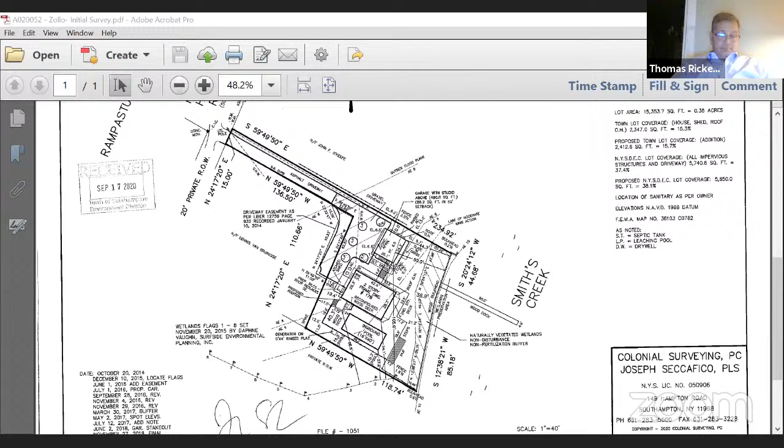It was an extremely frustrating process and very time-consuming, very costly to my clients. So we're here because we really don't want to go through that process again, because it was a nightmare.

The additional area that Marty's requesting on the south side, like I said, is naturally vegetated. The decking for the swimming pool is elevated, so it's not an area that's used by my clients. If the pictures that I submitted can be brought up, you can see what I'm talking about.

Daphne, did you email those to me or were those hand delivered? I emailed them to you, and I also uploaded them when I signed in to speak today. I don't know if Charles has access to them. I'm not sure how to get access to ones that were uploaded. Charles, do you know? Let me check my email right now. Actually, hold on, I think I got them. Yeah, I think I CC'd you on an email to Marty earlier this afternoon. Yes, I found them, hold on one second. Hold on, yep, that's them.

This first picture you're seeing is taken from the existing dock out in Smiths Creek, looking at the property. You can see the buffer is there, comprised of beach grass. There's also some bayberry, I think there's beach plum in there as well. It's heavily vegetated, it's in great shape. It's definitely an enhancement to the property.

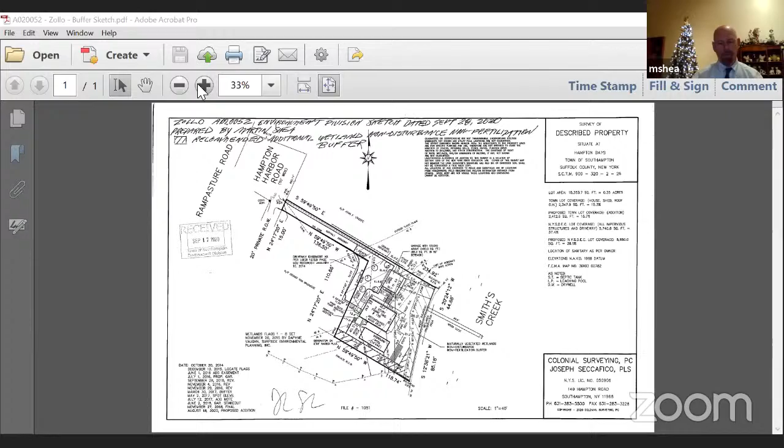Consistent with the board's policy of recommending additional buffer as mitigation when further development is planned at a site such as this, I have recommended a minor expansion and reconfiguration of the existing covenanted buffer. If you look at the southerly portion of the survey, I should mention the existing buffer, although well vegetated, is only about 10 to 20 feet wide.

The property, as you can see, fronts on Smiths Creek. This is a very environmentally sensitive area. You have extraordinary vegetated tidal wetlands to the south. So my goal is to ensure for the long term that those wetlands and their public values and benefits are well protected.

The change in the buffer that I'm recommending in that corner would include that triangular slashed area, which would actually link the existing landward boundary of the buffer with the landward boundary of tidal wetlands on the abutting vacant land to the south. And as indicated by the applicant, it would also continue along the southerly property boundary. It's a minor expansion in terms of buffer, but I think it's absolutely critical to mitigate the impacts of this project.

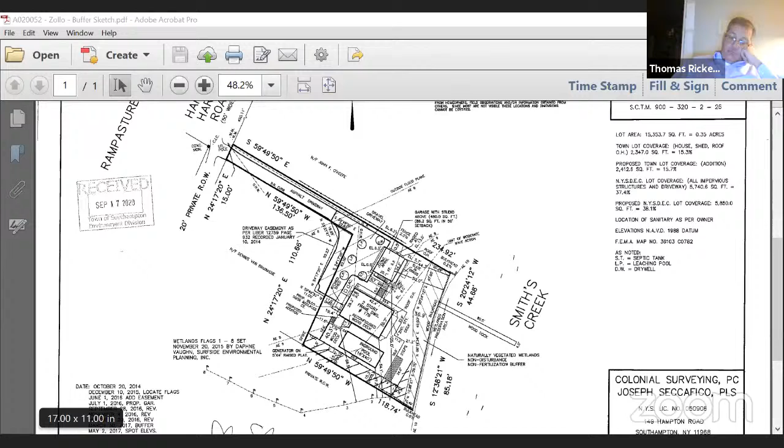Marty, could you help me out here in terms of what the purpose of a covenanted buffer would be if nothing really can be done with that particular property, and nothing can be done with the adjacent property, building-wise? Yeah, that assessment is actually incorrect. As per the town's building and zoning code, the landowner would be able to install a fence line along that southerly property line. They may be able to put additional utilities such as propane gas tanks. I think previously we had legalized the location of the pool equipment in that area.

So as you know, fence lines present a barrier in terms of wildlife use, so they are of concern. And the placement of any additional utilities, or let's say a kayak rack or something like that, by this owner or future owner, would result in clearing and loss of those valued native mature eastern red cedar trees. So the covenant is absolutely needed to ensure that none of those types of activities occur within that area.

While the frontage on Smith's Creek, they're trying to preserve the cedar trees there. I'm sorry, is that what you just said? You wanted to preserve the cedar trees that are in that? Yeah, the existing mature native Eastern red cedars. And in saying that, I'm not questioning whether or not the current landowner will continue to be a good steward of those trees. We're planning for the long term to ensure that future landowners don't cut those trees, clear that area, put a fence line in that area, put utilities or other uses in that area that would impact wildlife use and would impact the wetland values and benefits.

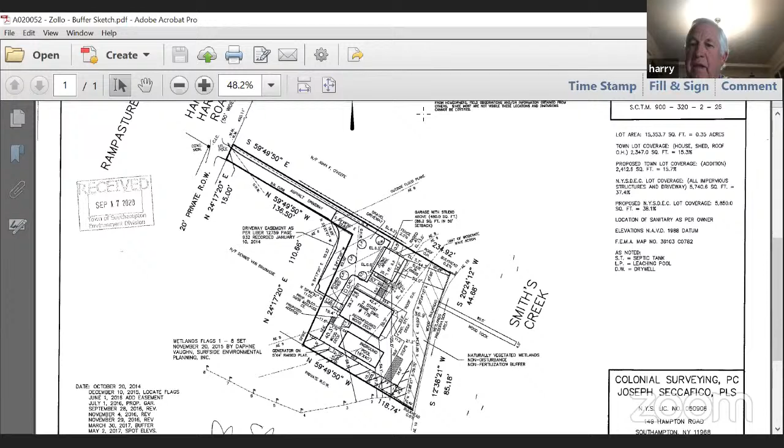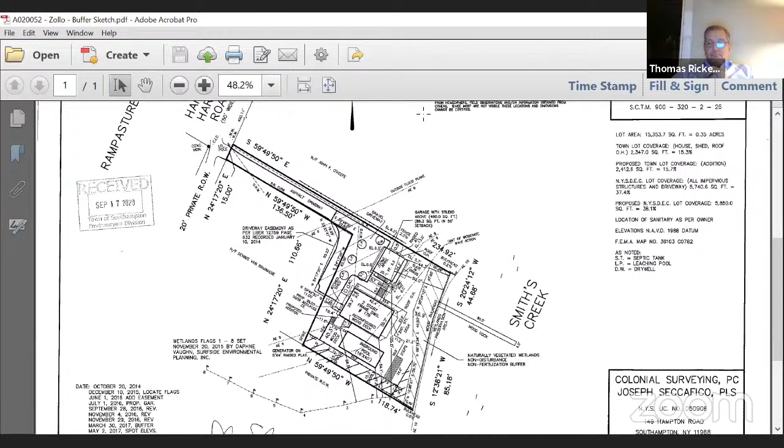I'm looking at this survey and I'm not able to tell the distance between the swimming pool and the proposed buffer. Is that in anybody's paperwork that has better eyes than I do, or with bigger print? Which setback are you looking for? The proposed - I'm looking south of the buffer, swimming pool and north of the proposed buffer. I'm wondering what that space is.

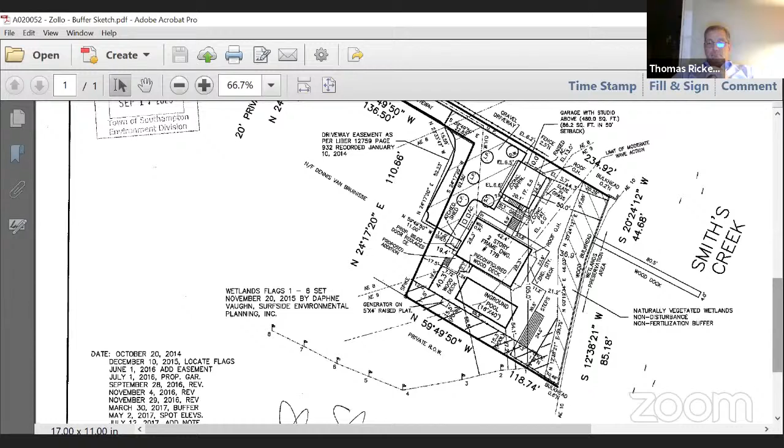Well, it's basically butted right up to the deck. So is that what you mean? Well, if it is, I thought there was a space there, but I could not discern the distance. There is - it's the part of the deck that goes on that side of the pool. Oh, yeah, so there is no distance between the pool deck and the buffer? No, there is - you can walk around. There's a narrow area on that side of the pool that you can walk on the deck. Right, but it's deck. So what he's saying is that the buffer would extend right to the edge of the deck.

Oh, I'm sorry, I misunderstood. We generally leave access for repairs and such and maintenance around structures. Yeah, but there's nothing stopping her from accessing through that buffer. Remember, we had this conversation in the past about what a non-disturbance, non-fertilization buffer means, and Marty had given testimony that you're allowed to access those areas and put chairs in and sit down there and do other activities as such. So I wouldn't see why she couldn't get in there and work under the deck.

Can that be confirmed by Marty or Kelly? Well, obviously, if the landowner had to do customary repairs to the deck and had difficulty accessing some of the joists or something like that, we would certainly, if necessary, allow for some pruning of branches to get under that portion of the deck. Generally you can get in there, but if they have some difficulty, they just need to contact me and I'll work with them to make sure there are no issues in terms of maintaining that deck.

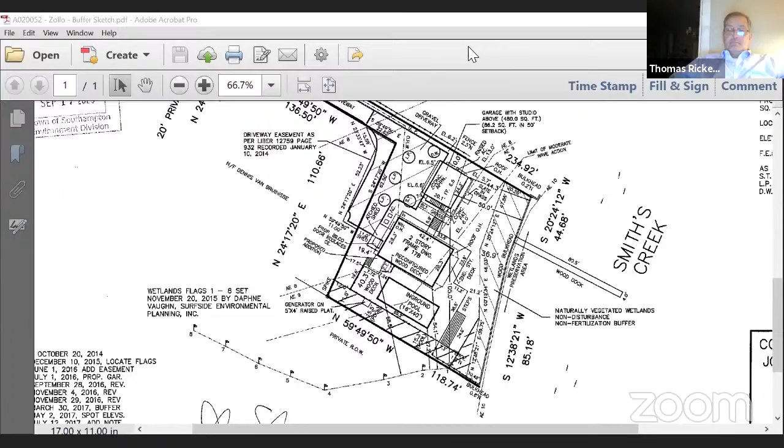And to the point of the bank and whatnot, for the very large, when we were adding on the garage, I totally understood about getting the bank. And I understand that it's our personal dilemma that we happen to have a mortgage with Chase, and they've proved to be very difficult. But the scope of that project was, as you guys were saying, so much bigger that I wouldn't have even thought of asking for forgiveness from that portion of the request.

The code actually recommends that where new construction is proposed within the existing footprint of structural improvements, a minimum 50-foot buffer be established. So I'm asking for a very minimal buffer.

No buffer, no covenant, right? Can't have a buffer without a covenant.

Well, you can, but we try and make sure that buffers are covenanted in order to guarantee their long-term protection. Wait, so we can have a buffer without a covenant? Well, you can, but... It's typically recommended that you record a covenant so that the buffer requirement runs with the property. That's not to say you can't require a buffer without a covenant.

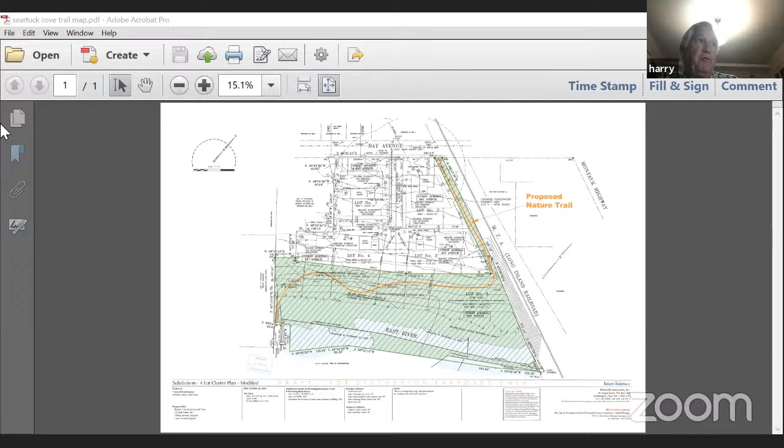Is there a motion to approve the draft conditions of final approval? So moved. Second. Resolved that the Town Conservation Board hereby approves the draft conditions of final approval of the subdivision of Seatuck Estates, which were referred by the Planning Board to the Conservation Board on November 24th, 2020.

All in favor? Harry, aye. George? Aye. Tom? Aye. Ann? Aye. Jerry? Aye. And Michael? Aye.

Administrative wetland permits are in your packets, conditional approval. Wait, you have to go over the scope for 94 Dune Road. Oh sorry, I completely skipped that one. Sorry, we got one more - Planning Board, 94 Dune Road Holding Corp. Yeah, we got to do that tonight, the draft DEIS scope.

Okay, so Teresa Mason from the Environment Division. This property is known as 94 Dune Road Holdings Corp, also known as Dockers, which currently houses a non-conforming restaurant and dock with some tennis courts. Again, as discussed at the last meeting, this application for the conversion of the existing non-conforming restaurant to 25 condominium units, which is also a non-conforming use, requires preparation of a draft environmental impact statement due to the potential negative impacts of having 25 units on this parcel, which is approximately 8 acres, half of which is wetlands.

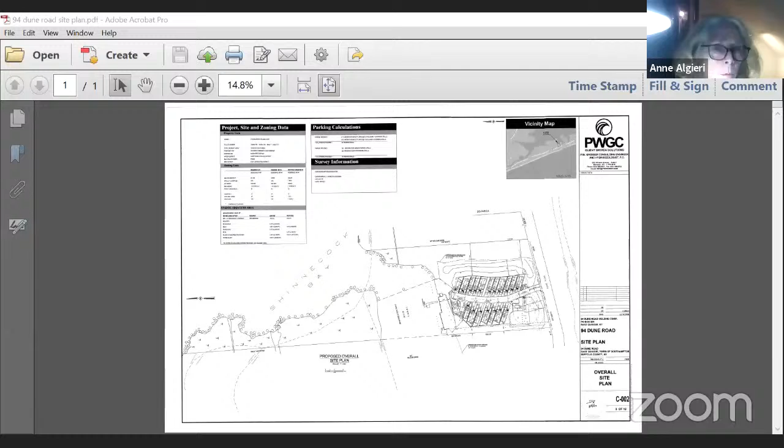Welcome. Teresa, I don't know if it's important to get in there, but Jerry brought this up about the flooding, in point number 9, where there's reference to the inundation during future storm events. At this point, there's even a sign up there saying you may not be able to get through during high tides. There's flooding there without storms, just on a regular basis.

If you look at point number 11, the transportation subsection, it says it needs to be amended to ensure the analysis of traffic impacts associated with construction during the summer season is included in the DEIS. Furthermore, traffic impacts during a coastal evacuation needs to be included in the draft scope.

And then also, item 12, it goes on to say— oh wait, no, that's not the right one. Number 9 talks about the coastal evacuation and the storm events and potential barrier breach.

Teresa, could you clarify, these comments are in regard to their DEIS scope, correct? Right, so it is in response to their scope.

So the process works like this: the POSDEC gets issued, and the applicant submits a scope, which is an outline of what's going to be discussed in the DEIS. And this is where we say you need to talk about A, B, C, and D also, and that would get incorporated into their final scope, which would be the basis for their draft environmental impact statement.

So this is a preliminary process before they actually do the DEIS, correct? That's correct. Everything that gets put in the final scope that gets adopted by the planning board has to be addressed by the applicant in the DEIS. So that's the next thing we'll be waiting for, the actual DEIS. That's correct. And then we can respond to that.

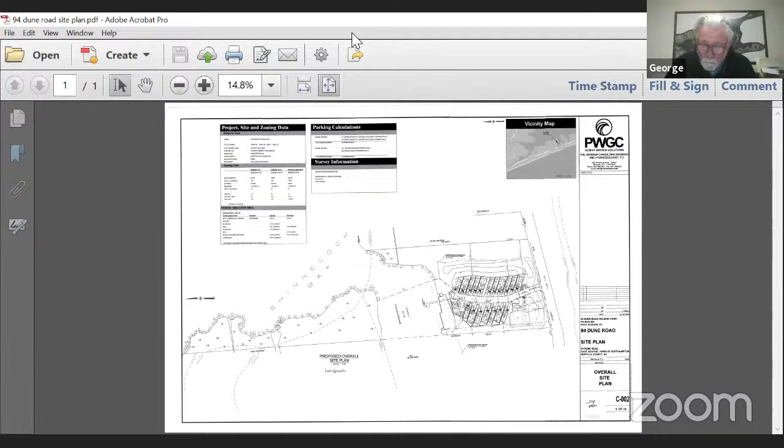Okay, thank you. You're welcome. Anybody else have any other comments they want to add to the report? No, just you did a very nice and thorough job. Thank you. You're welcome.

Is there a motion? Making a motion to have the comments sent. Second? All in favor? Harry, aye. George, aye. Tom, aye. Ann, aye. Jerry, aye. Michael, aye.

And now the administrative wetland permits in your packets. We'll move on for conditional approval.

020009 Almonds LLC. Any discussion? Move to issue. Second. Resolved that a conditional wetland permit approval be granted to Almonds LLC for the proposed project upon the terms and conditions set forth therein. All in favor? Harry, aye. George, aye. Tom, aye. Ann, aye. Jerry, aye. Michael, aye.

A 020053 Lewis Kennedy. Any discussion? Move to issue. Second. Resolved that a conditional wetland permit approval be granted to Lewis Kennedy for the proposed project upon the terms and conditions set forth therein. All in favor? Harry, aye. George, aye. Tom, aye. Ann, aye. Jerry, aye. Michael, aye.

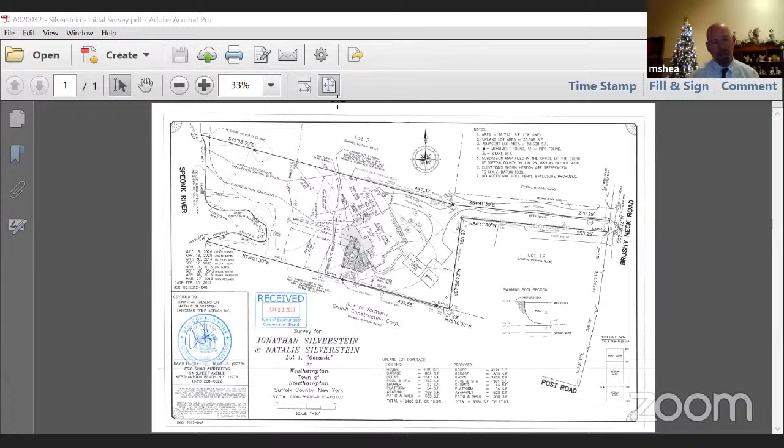The property, as you can see, has frontage on the Speonk River and contains extensive tidal wetlands, as well as naturally vegetated buffers that have been preserved through establishment of a conservation easement and covenants previously required by this board. The applicant is seeking a wetland permit in order to undertake various renovations and improvements, mostly within the existing footprint.

They include demolition and reconstruction of the on-site swimming pool, partial deck demolition and replacement with some deck addition. The stairs need to be reconfigured. The shower needs to be replaced. There's an exterior barbecue as well.

There is a preliminary advisory report on file dated November 27, 2020. Years ago, when the Conservation Board had previously issued a permit, the covenant that was recorded allowed for the buffer to be managed by one annual mowing throughout virtually the entirety of the buffer and easement on this property.

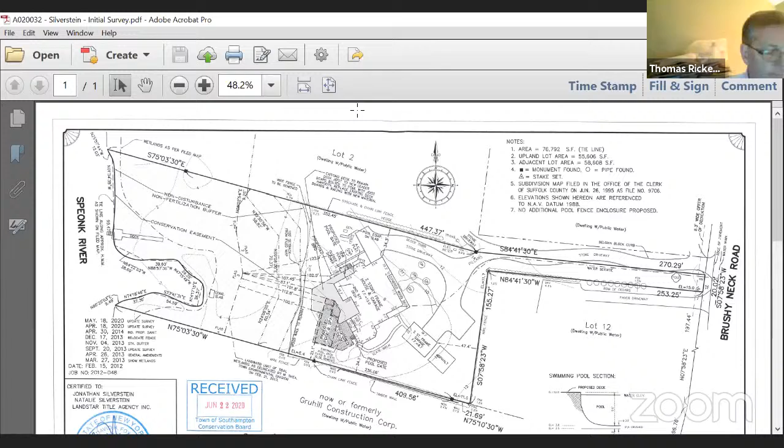Based on my site evaluation, those mowing practices have ceased. And we now have a thriving, biodiverse, woody and herbaceous wetland meadow and surrounding upland buffer.

Although part of the existing accessory footprint would be extended, there's another portion that would be cut back. The easement and buffer taking a considerable portion of this property.

I have asked the applicant to agree to file an amended covenant, which would no longer allow for active management or mowing of this buffer area, as the buffer is virtually exemplary in terms of its health, integrity, and biodiversity. The applicant has agreed to that mitigation.

The applicant is also removing a fence line at the landward boundary of the easement and buffer, as it's no longer needed as a pool enclosure fence. The elevated pool can be secured by railings and gates. The removal of that fence will also remove an existing barrier to wildlife movement through the area, so will be most beneficial.

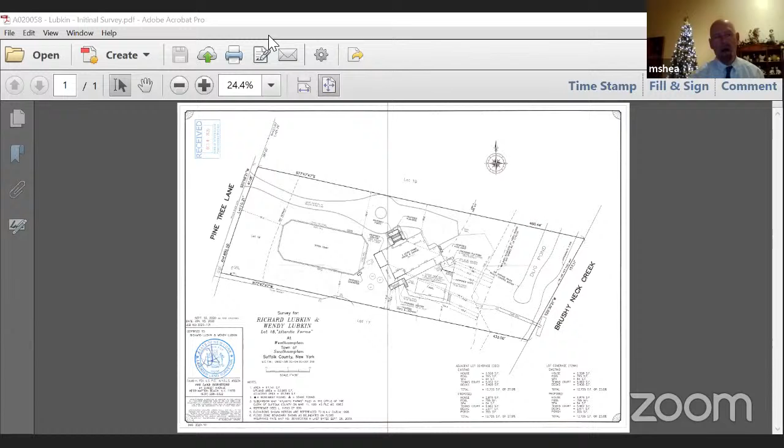The applicant has agreed to all this mitigation. So this is an application for which we have sufficient information to make a determination. Accordingly, I'm recommending that the hearing requirement be waived.

Motion to waive the public hearing. Second. Resolved that the Town Conservation Board hereby waives the public hearing requirement pursuant to Chapter 325, Section 325-8E of the Town Code. All in favor? Harry, aye. George, aye. Tom, aye. Ann, aye. Jerry, aye. Michael, aye.

A020068, Jonez'N For the Beach, LLC. Therese Mason from the Environment Division. The application is to legalize the demolition of an existing one-story dwelling with approximately 1,100 square foot footprint, located approximately 82 feet from the wetlands.

And to legalize the partial reconstruction of the foundation, and proceed with completing residential additions that were previously authorized. The parcel is located on Jones Road, and it is on a portion of Shinnecock Bay and Carter's Creek. It is a Type 2 action pursuant to SEQRA in Chapter 157 of the Town Code.

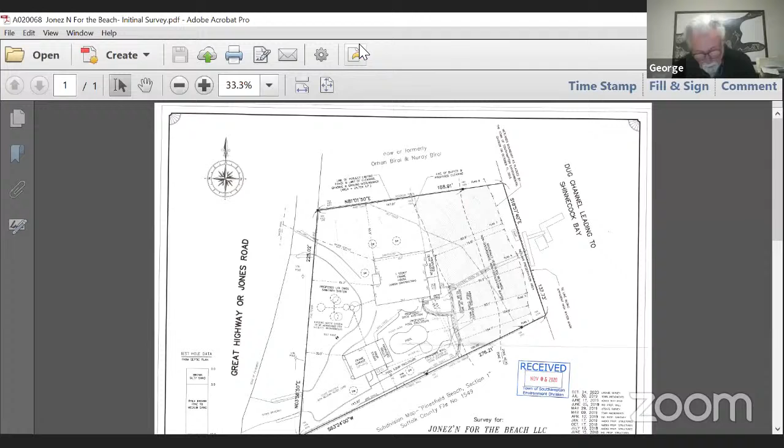Motion to waive the public hearing. Second. Resolved that the Town Conservation Board hereby waives the public hearing requirement pursuant to Chapter 325, Section 325-8E of the Town Code. All in favor? Harry, aye. George, aye. Tom, aye. Ann, aye. Jerry, aye. Michael, aye.

A020070, Peter E. Castro and Joan R. DeMaria as joint tenants with right of survivorship.

Marty Shea, Chief Environmental Analyst for the town. This application relates to an existing residentially developed property in the private community of Shinnecock Shores. The lot has frontage on an existing man-made canal or dug lagoon.

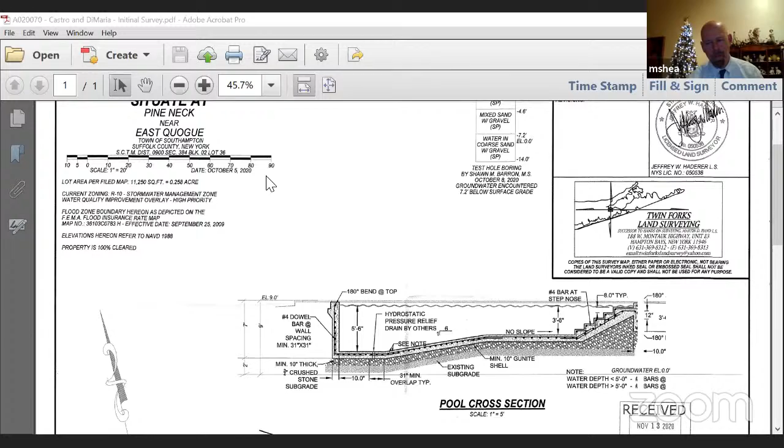There is a preliminary advisory report on file dated November 27, 2020. The applicant is seeking a wetlands permit in order to construct an in-ground swimming pool on the water side of the house.

When I inspected the property, I found the rear yard leading down to the lagoon to be moderately sloped and heavily eroded, as a result of recent bulkhead reconstruction work done pursuant to a trustee's permit. I also found the frame shed, in the northwest corner of the property, to be a new, larger shed that was installed to replace the former shed without the requisite wetland permit.

I've asked that the shed be relocated further landward, and that a covenanted, naturally vegetated wetland non-disturbance, non-fertilization buffer be established 24 feet landward of the wood cap alongside the bulkhead. That is consistent with this board's policy for interior bulkheaded canal lots in Shinnecock Shores. I have also asked that they come forward with a slope stabilization and reclamation plan, as well as native planting specifications.

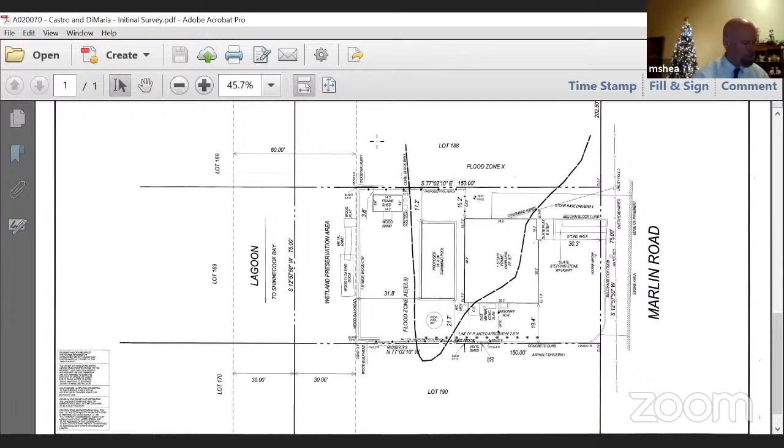Are you asking for a hearing to be scheduled, Marty? Yes. Motion to schedule a public hearing? Second. What date? The resolution before me is for a waiving of the public hearing. No, a hearing needs to be held.

I spoke with the applicant's consultant, Kevin Springer Lake, this afternoon. He was unable to get in touch with the landowner, but he assured me that the landowner is going to want to go to a public hearing. So you need to amend the resolution before you to a hearing. I think that hearing can probably be scheduled for the second meeting in January. It would have to go on the first meeting because of the dates.

Do they have time to notice and everything by January 6th? January 13th. Okay, we can do 13th. So this is a motion and it's been seconded. Resolved that the Town Conservation Board hereby schedules the public hearing for January 13th, 2021, and that a notice of public hearing be published in the town designated newspaper pursuant to Chapter 325, Section 325-8C of the Town Code.